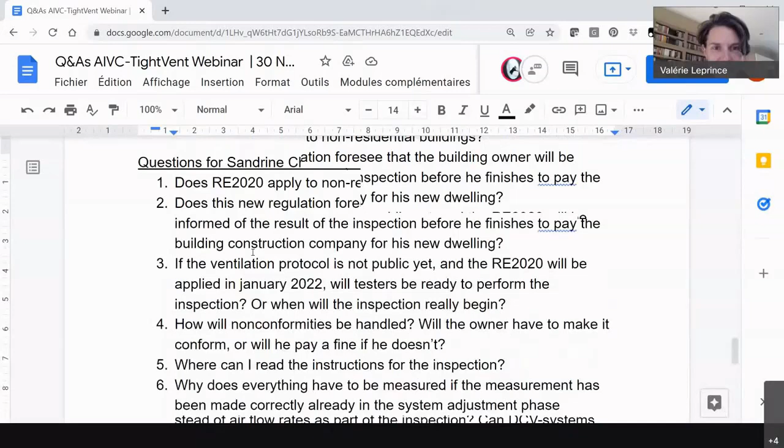So for Sandrine, here it is. So the first question is an easy one.

Does RE2020 apply to non-residential buildings also? Yes, RE2020 applies to non-residential buildings, but the verification of ventilation system is not mandatory for non-residential buildings. So it applies to all buildings, but it's only residential buildings where we have a verification of ventilation system, basically because we don't have a proper regulation for non-residential building ventilation in France.

So does this new regulation foresee that the building owner will be informed of the result of the inspection before he finishes paying the building construction company for these new dwellings? We have French people in the attendance, I guess.

Yes, it's the owner who will contract with the inspector who will make this verification. So the owner will be aware of the results of this inspection. And we expect that in case of non-conformity, the owner asks for the conformity and for some works so as the ventilation system to be conform. So the owner will have the results of the inspection, and it's his own responsibility to wait for the results before he finishes paying the construction company.

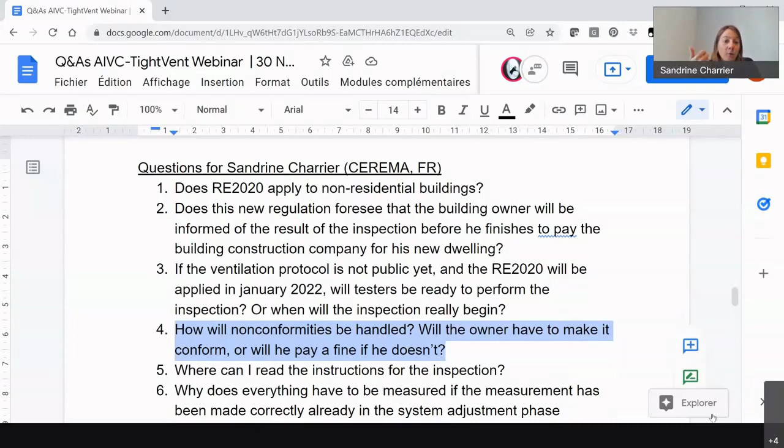But we expect that the same occurs as what occurred with building airtightness around 12 years ago, when we had a bad result for building airtightness and a non-conformity, the owner asked for the conformity of the results. So we expect the same behavior of the owners. If he sees that the ventilation system is not conform, we expect he asks for the conformity of the ventilation system. But nothing is actually written in the regulation. We expect that he will want his building to be conform and make sure the company makes it conform.

Okay, where can I read the instructions for the inspection? The French state uses an internet website, and I can give it to you. It's RT-RE-bâtiment. Oh okay, it's very difficult. I can send it to you if you want. I'll send it here. Bâtiment-développement-durable.gouv.fr. No, it's a very difficult name for the website. Okay, I will check if it's the good one, and I'll tell you. Okay, put it in the chat. Okay, thank you.

But it will be online only in December. So yeah.

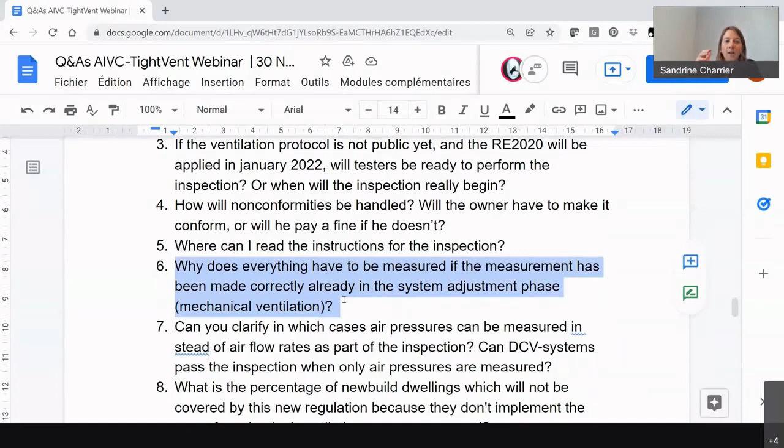We find on this website the text for the training that will be approved by the ministry, and the qualification; all requirements for these trainings and for these qualifications are available on this website. Yeah, and for the protocol, you can also check the Promevent website. Much easier to find the website here with the former protocol that has been used to make this one.

Why does everything have to be measured if the measurement has been made correctly already in the system adjustment phase? So if there is a proper commissioning done by the company, why should we measure everything? Because we are not sure that there is a proper commissioning that is done. I think measurements at commissioning are not very often done in France. So this is the reason why there is this mandatory check.

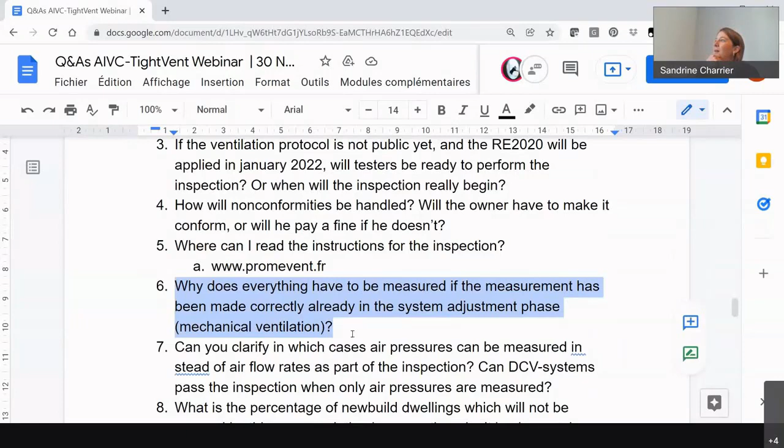In France, for 20 years we have seen that ventilation systems are not well installed, or do not function correctly. And this is the reason why we come to a regulation on the systems, because it doesn't work. For 20 years we have said it, and it's not better. So this is the reason why we come to a regulation on it.

Okay. Can you clarify in which cases air pressure can be measured instead of airflow rate as part of the inspection? Can demand controlled ventilation systems pass the inspection when only air pressures are measured? So air pressures are measured in very specific points that are described in the protocol, and air pressure is measured only when we have humidity-controlled ventilation systems. Yeah, that's it. And for those systems, we have low airflows, and the measurement of the air pressures is better to verify that the extract diffuser, and all the ventilation system, is well installed. So this is very well described in the protocol.

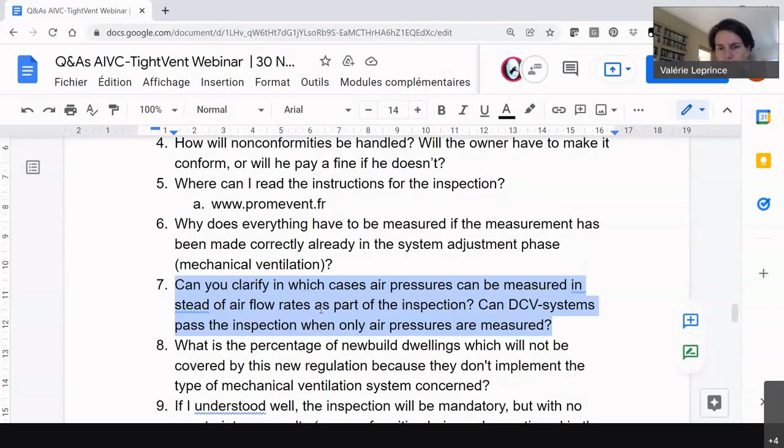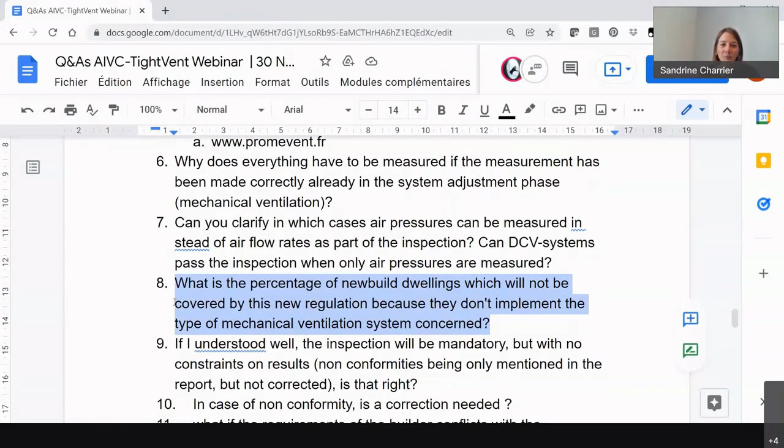Yeah, I guess. So what is the percentage of new build dwellings which will not be covered by this new regulation because they don't implement the type of mechanical ventilation system concerned? I'm not sure I'm able to answer that question. I think it's a very small percentage, because the big majority of new buildings are equipped with a mechanical ventilation system. But I don't have the right percentage, and I wouldn't like to communicate a false one. So I don't know, but I think it's a very small percentage. It's a few percent, like 2 or 3%, something like that. Yeah, maybe. I would guess.

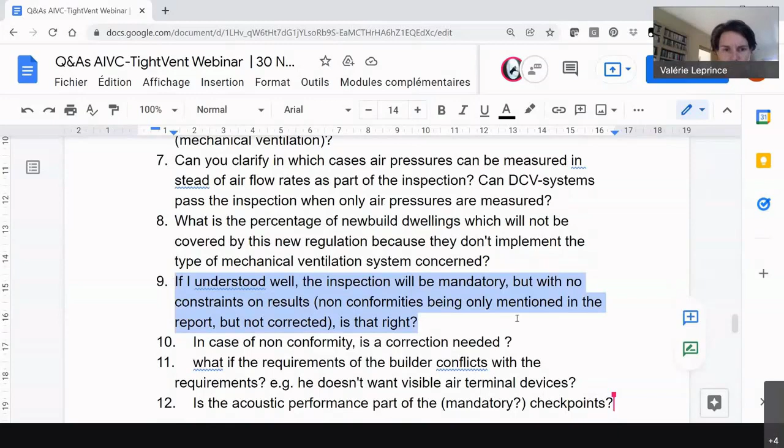If I understood well, the inspection will be mandatory, but with no constraints on the results, non-conformity being only mentioned in the report but not corrected. Is that right? I think you already covered this question together with this one: in case of non-conformity, is a correction needed? Well, we expect the owner to do that.

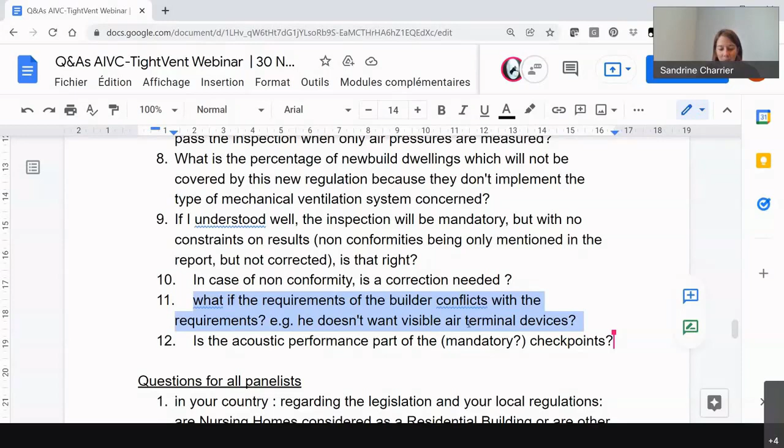What if the requirements of the builder conflict with the requirement? For example, he doesn't want visible air terminal devices. All the checkpoints that are verified are checkpoints which correspond to a regulation. So the owner has to respect the regulations and has to apply those points. All the mandatory checkpoints are consistent with an actual regulation, so he has to apply them. And yes, if those mandatory checkpoints are non-conform, the ventilation system is non-conform to regulations. So the builder has to make those points conform.

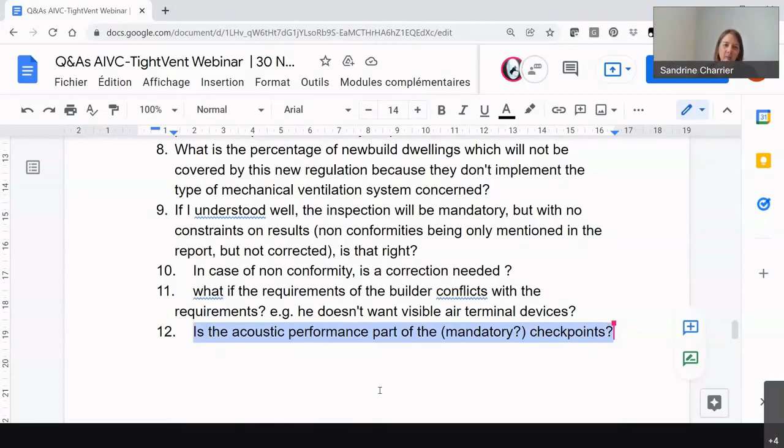Is the acoustic performance part of the checkpoints, mandatory ones or not? No, there is no part about acoustics. Not a mandatory part. No, and there is no measurement either on acoustics. Okay.

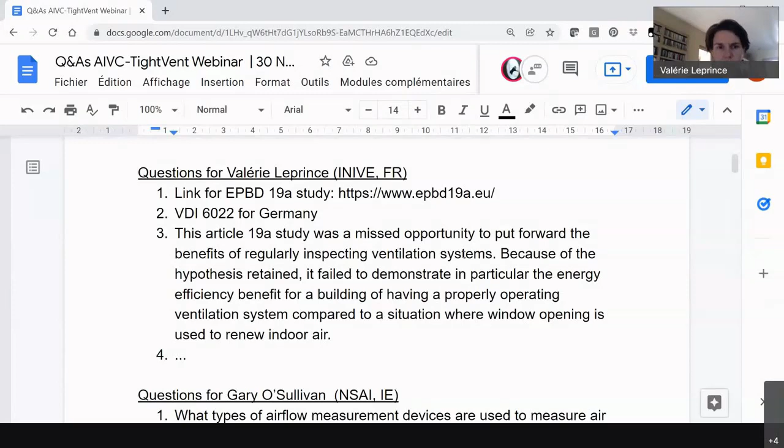So there was a remark saying that the EPBD 19A has missed the opportunity to put forward the benefit of regular inspection of ventilation systems. I agree with that, but that was not the scope of EPBD 19A, but indeed regular inspection of ventilation systems is also very, very important.

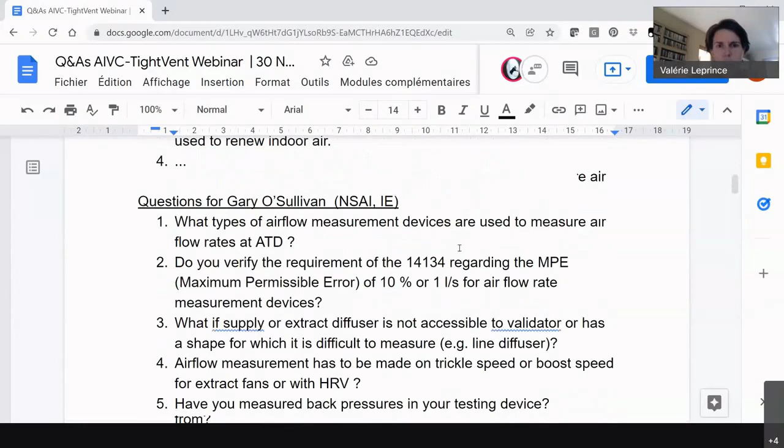Yeah. Where does the value of Q50 of 3-5 for a naturally ventilated building come from? From the building regulations.

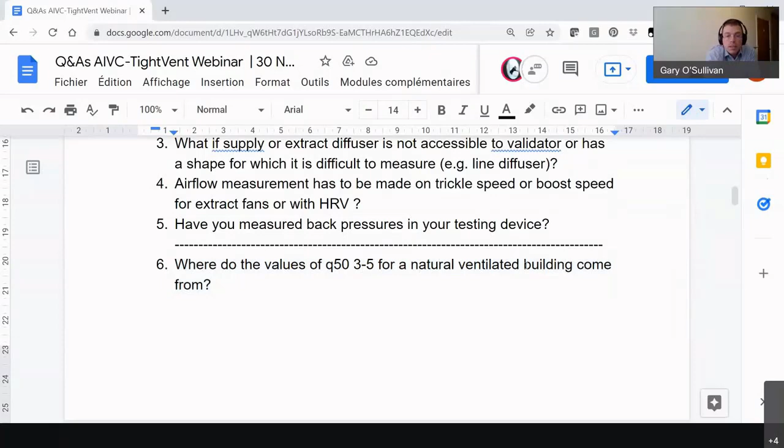Is it Part L or Part F? I'm not entirely sure, but it is stipulated that an air permeability index of between 3 and 5 is the only allowable parameter for natural ventilation. It's in Part F, I think, actually. Part F of the Irish regulation.

Okay. Yeah. And for Dan here, Dan, you're still with us, right?

Yes, I'm here. Okay. Are there tools available on air handling unit or chiller control systems that automatically export the report that you were talking about? Do you have software that makes it automatic? Yes, it's possible. There are software solutions available to create automated reports. Yes, but these reports contain just very basic information, no individual information, and results which mostly depend from system to system.

So software is available, but actually, if you have a specific, individual, big building with a lot of individual air conditioning systems, I would use only basic functions of this software. Okay. To create an independent report.

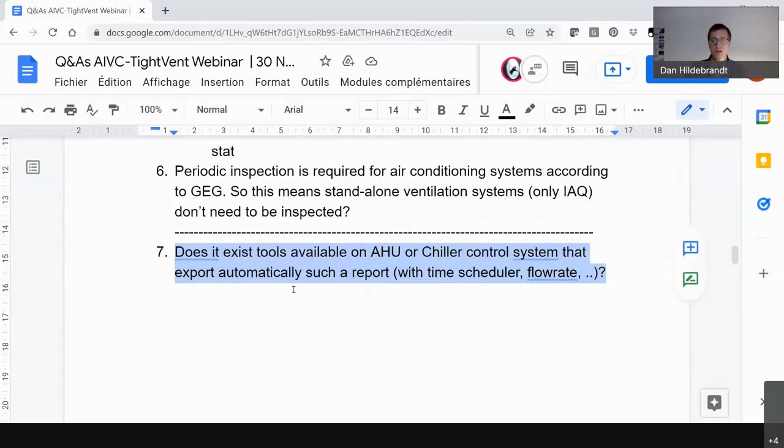And then we have two questions for everybody. In your country, regarding legislation or your local regulation, are nursing homes, so homes for elderly people, considered as residential buildings, or do other regulations apply for healthcare buildings? Do you know in France, Sandrine? I think it's not considered as a residential building. It's another kind of building with another regulation.

Yeah, in Ireland, nursing homes, hospitals, and the like are considered residential buildings, but they're residential institutional buildings as distinct from dwellings. Okay. Residential institutional building. Oh, yeah, that's a good idea. Okay, Dan, in Germany.

I think healthcare buildings, it depends what it means. If there are parts of the building like rooms or meeting halls which are filled with people, used by people, then we need to inspect according to GEG. If there are industry processes behind, like cooling facilities and so on, there are specific rules. But if people are affected by the ventilation systems, then we need to work according to GEG, the national rule.